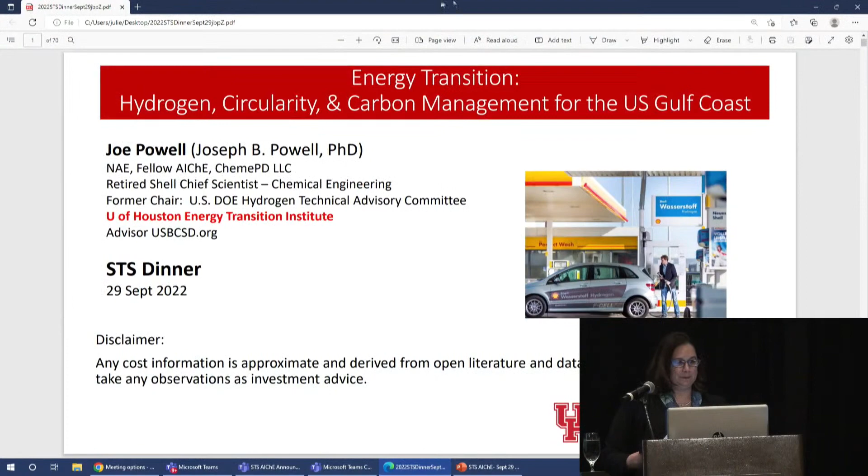So I guess the lesson is if you say yes and volunteer to do things, you'll be surprised at the number of things you can get involved with over a long career. And AIChE is one of the greatest places to be to do that.

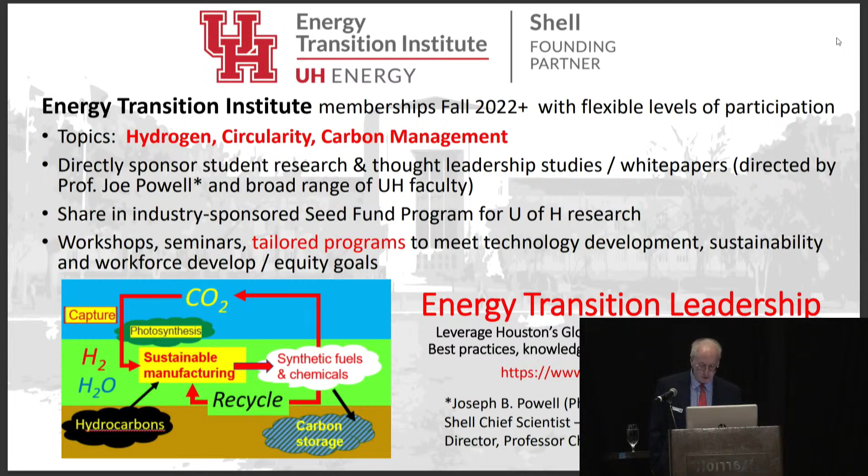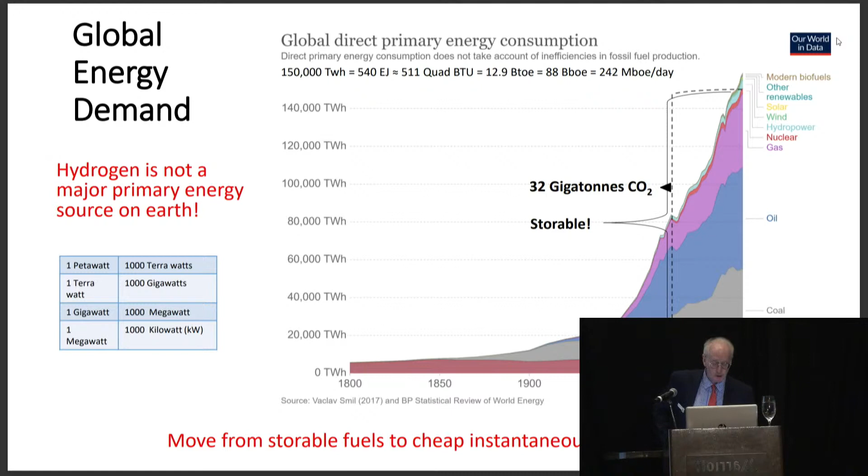Excuse me. So global energy demand. Looking at a new source of energy going forward into the future here. Everything we've seen to date has been a storable fuel, starting with traditional biomass and then moving up to coal, oil, and natural gas. But if you look at the energy sources that are emerging today, they are primarily the renewable wind and solar, and they are not storable. So that's really going to be a game changer in terms of the energy transition going forward and should give you food for thought in terms of how to manage these systems.

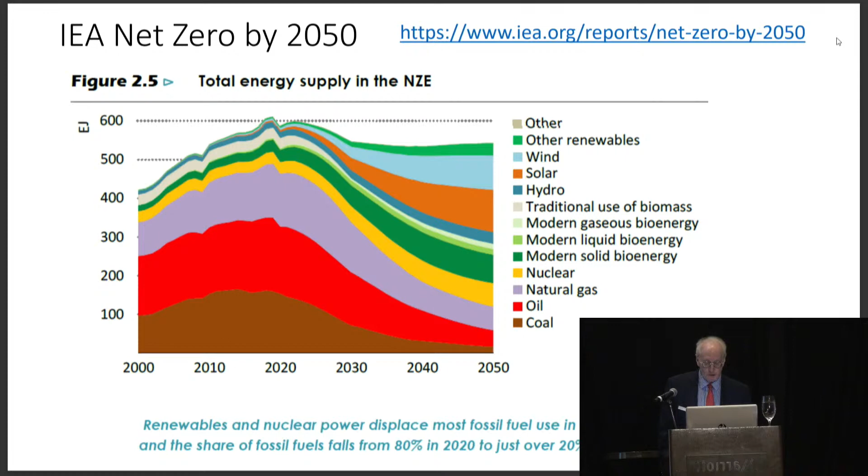So the IEA looks at a pathway to net zero. Shell has published the same in its Shell Scenario publications. The issue that everyone is looking at is, when is peak oil and gas and coal, certainly, and the IEA is saying that's here right about now. And so looking at future energy, we're going to be moving into more of those renewables. You see solar in orange here, the wind in blue, other renewables in light green, and diminishing use of the coal, oil, and gas there in the center, starting at about this point in time. So that's what the energy transition is about.

Hydrogen, where is it going to play in this energy transition? So we have a course on that at the U of H, and my boss, Ellen Rossiter, is teaching that hydrogen economy course. If you want to be learning more about that going forward, there's a 3-hour credit class where we get into much more detail than what you will hear about tonight.

But the important thing to remember about hydrogen is its greatly expanded use, not because of the traditional uses of hydrogen, but because it's going into new sectors, and that includes mobility, industry. It's replacing a number of features that were previously serviced by gasoline and petroleum, but then also on the liquefied natural gas side of things. And if you look at where that can be happening, the key point is the energy density of hydrogen relative to electrification and batteries. So you really can't move or store energy in the form of batteries and can't make those movements over great distances. And so you're looking at hydrogen as that vector that can be moving this energy around and storing it.

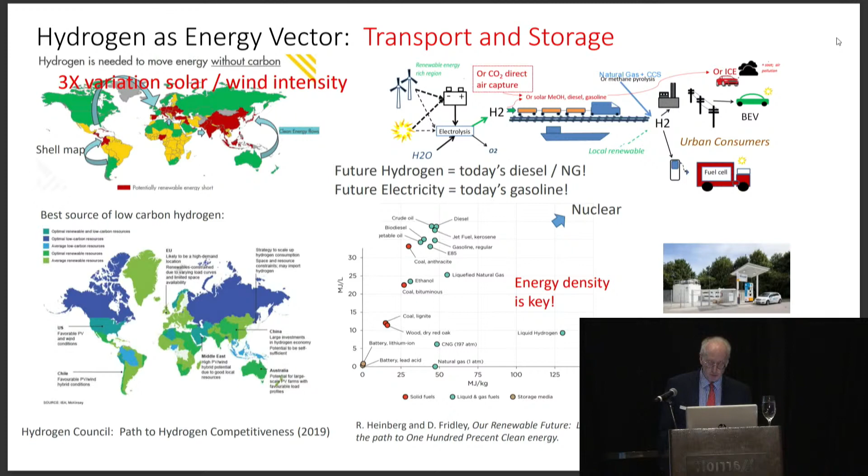On the bottom left, you see locations in deep blue where you can make hydrogen from natural gas with CCS and reforming. The light green are the regions where you have a lot of renewable resources. And the turquoise, which includes this region, the US, but also the Middle East and a few other locations, are where you can do both. And so those are the resource-rich regions that the world will be looking to for energy, and hydrogen is one of the key vectors to get it into the markets where it's needed. Again, because of that energy density.

So looking at roadmaps going forward on what is the prognosis for the emerging hydrogen economy. And so this particular reference from the World Energy Council shows the roadmap of roadmaps.

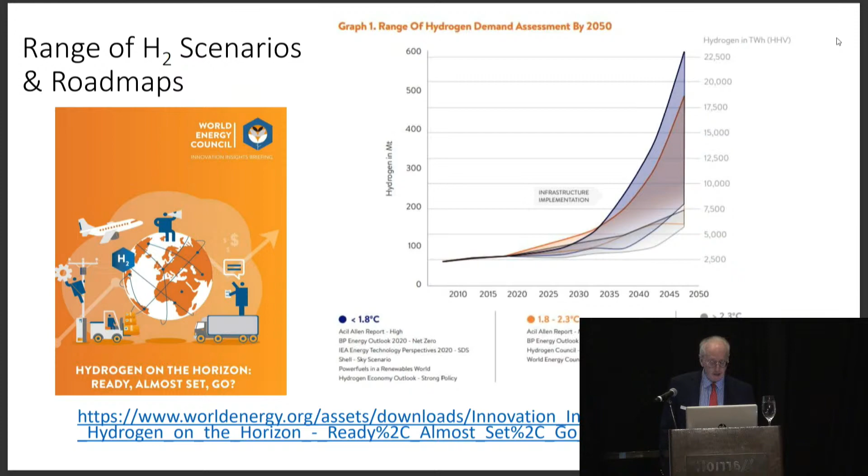Hydrogen can have growth from something like twofold, 200%, up to more than 10 times that in terms of future demand. A lot of that depends on local energy security issues versus the amount of global trade. If you look at the Shell scenarios, in the most ambitious scenario where the world is most wealthy is where we have a lot of trade, and there will be a lot of hydrogen uptake as the vector for renewable energy trade, with a large uptake in the use of hydrogen going forward.

Now, hydrogen is not new. Discovered many centuries ago, there was a novel from Jules Verne, Mysterious Island, where they actually predicted the electrolysis of water and using renewable energy to generate hydrogen from water. So certainly it's been known and a usable vector for some time, but we're now just getting to the point where we can really see it become a commercial reality. I was born at the time of Sputnik, where really the space race challenge and the arms races from the Cold War era became front and center.

Hydrogen was a very important mechanism involved in our early space programs, in terms of the clean energy provisions for the space flights, from the Gemini missions and Apollo later.

Going into 2000, the second President Bush said that everybody being born at that time would be driving hydrogen fuel cell vehicles by the time they were graduating from college. That didn't happen. Ballard Power Systems had come up with the first commercial fuel cell about that time, and there was an assumption that the hydrogen economy would be taking off from then. It didn't happen because the other factors needed to make hydrogen successful had not been co-invented to the point where the cost could be reduced enough for it to be a viable vector.

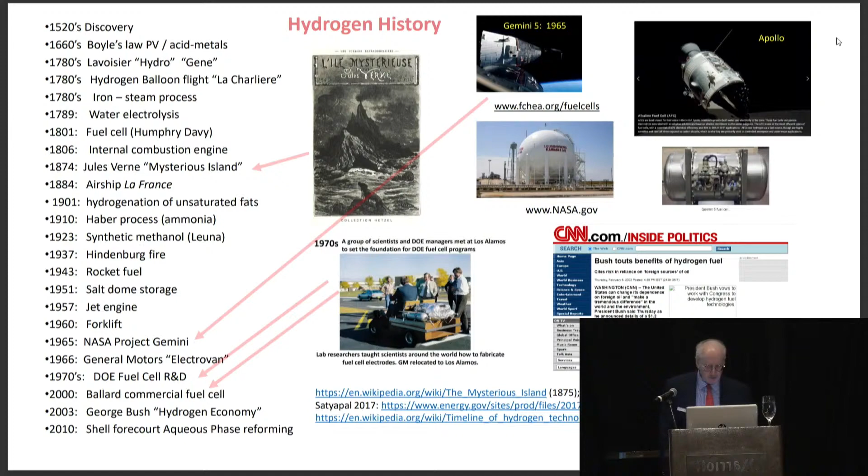You really have to care about climate change and clean energy to be competitive in this market space. And that's what we're seeing today in terms of what the stakeholders are saying about what they want in future energy. So the US DOE looks at hydrogen at scale.

We're all chemical engineers here, you know the six-tenths power rule. But if you can get your end uses up so that your scale of manufacturing can be strong enough, then the price of manufacturing comes down. To do that, you need to see hydrogen going into multiple sectors, from transportation to traditional ammonia fertilizers, also in industry and metals production, and in transportation fuels and refining. That is a key mechanism that's in all of the FOAs that are coming out now in terms of trying to launch the hydrogen economy.

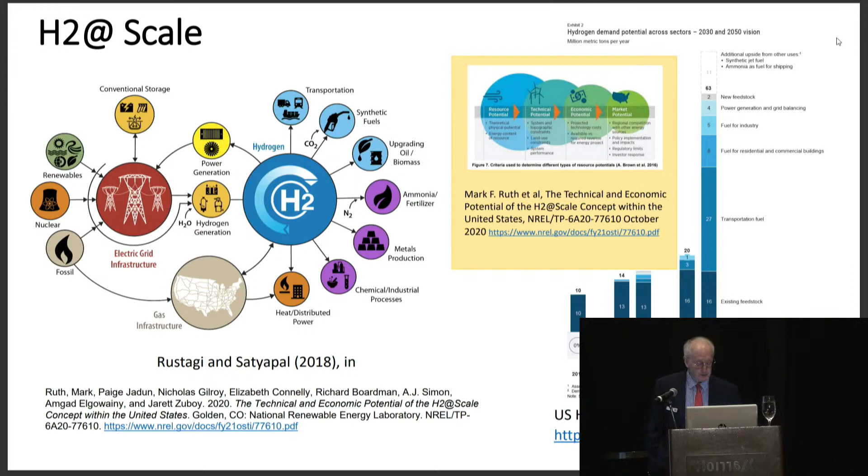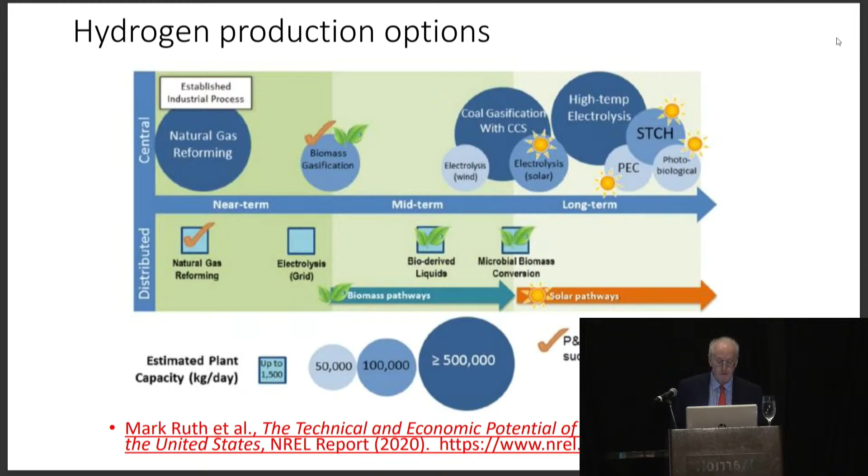You can make hydrogen, of course, from natural gas or any carbon-based fuel using reforming reactions with water. You can gasify biomass, and you can also bring in electrical power from renewable energy, nuclear and others, and do electrolysis of water. The production can either be central or distributed because of all these different routes to production. And the critical issue is how will this sort itself out as we move forward into this potential hydrogen economy.

Many people talk about the different colors of hydrogen. Tonight, I'm only going to focus on about 3 of the key areas. The gray hydrogen is the traditional manufacture of hydrogen, mostly from natural gas today. The ones we're really focusing on going forward include the blue hydrogen, which would be the same reforming of natural gas, coupled with carbon capture and storage, CCS, to reduce the carbon emissions associated with it.

If you're using renewable energy, then that's usually called green hydrogen. Some people call it yellow if generated from solar power, but green is the most common term, implying it's derived from green energy. If it's coming from nuclear power, it can be called pink hydrogen. And then turquoise is hydrogen produced by pyrolysis of methane into solid carbon and hydrogen, and we'll talk about that in just a moment.

White, as we were mentioning earlier, is naturally occurring hydrogen, which has limited availability, but is now being discovered in small amounts subsurface.

So cost of hydrogen—there's an excellent paper from Parkinson at Imperial College that does a nice literature review. These days you have to adjust all numbers for inflation, but up to two years back, these numbers were quite good and give a good comparison of estimates of what the different routes to hydrogen would entail in terms of costs, and also some of the details behind that.

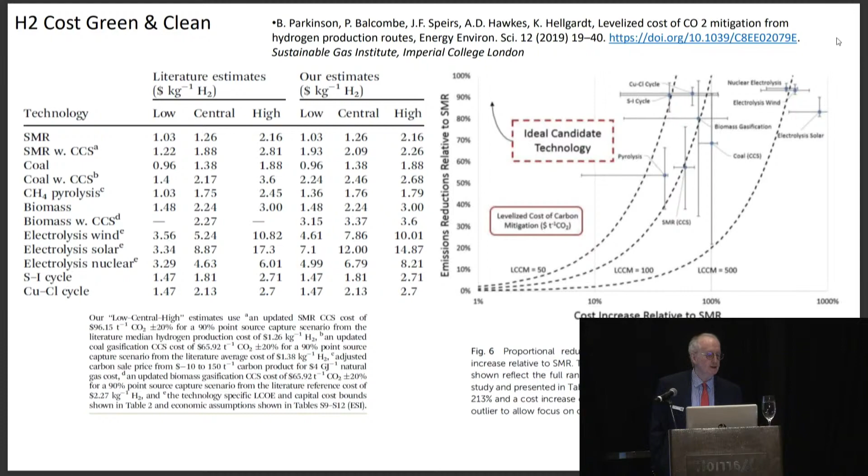The thing to keep in mind when you're looking at all these different colors of hydrogen, and especially blue hydrogen, is that the extent of decarbonization can vary quite a bit with that hydrogen. So you really have to look beyond the colors and ask what is the total carbon footprint associated with that hydrogen in terms of the production process by which it was delivered.

These are some of the key reactions underpinning the green electrolysis of water, which requires a very large amount of energy. Turquoise methane pyrolysis requires quite a bit less, but you have to be able to do something with the solid carbon, and that has to be a sequestered product.

If you're going to put it into tires and make carbon black and then burn the tires after five years, that's going back to the atmosphere, and so that is not sequestered carbon.

Steam methane reforming, again, is the most prominent way of making hydrogen today. You're making CO2, and then you have to capture and sequester the CO2 or turn it into utilization products, as we'll talk about in the second part of the presentation tonight.

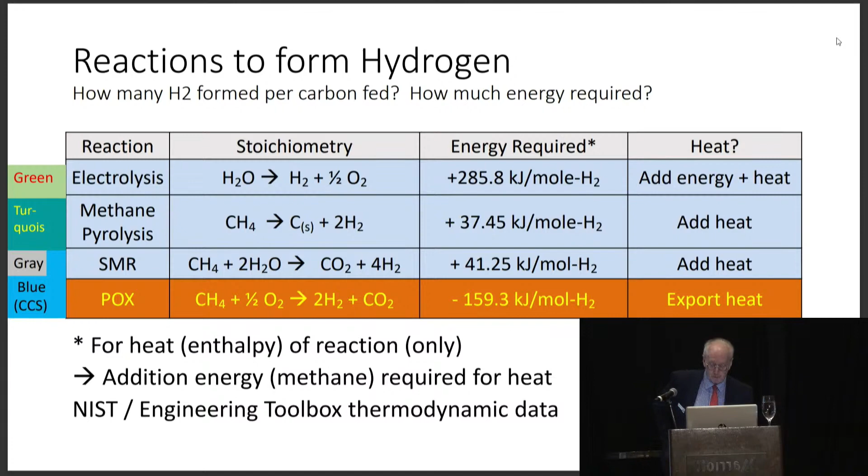You can also do all of this by partial oxidation and autothermal reforming, and we'll talk about that more in just a moment.

If you're looking at feedstock choices, you can take anything that has carbon in it and reform it with water to make hydrogen. Of course, methane has the highest hydrogen-to-carbon ratio, and so it's the natural starting point.

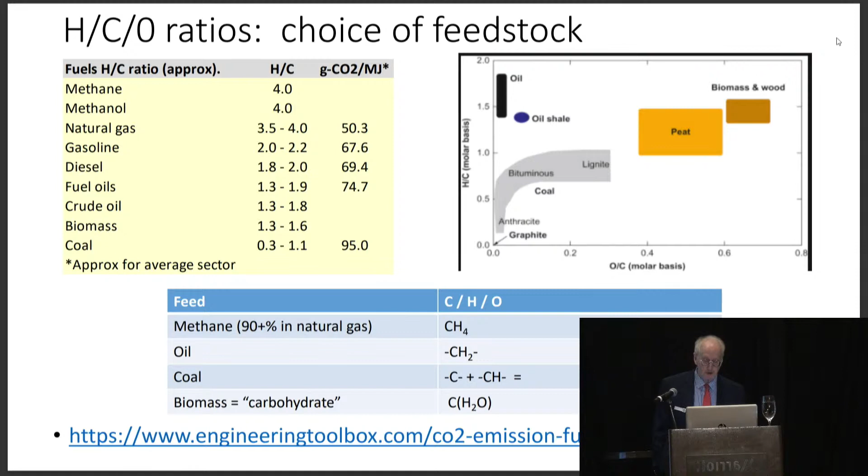If you're into biomass, you have to subtract out the water component and recognize that biomass is quite a bit carbohydrates, which means CH2O, and you really have to subtract out that amount of hydrogen that's complexed with water in those molecules to understand the effective ratio. But methane, having the highest ratio, is the preferred feedstock for synthesis from the fossil fuels.

Hydrogen via biomass gasification—you certainly can do that. At Shell, we spent quite some effort developing advanced biofuels processes, but the interesting thing is you're struggling with the energy density there. If you look at that truck on the right-hand side and look at the energy density of wood or wood chips or a typical biomass feedstock, it's coming in 50% wet, drying is difficult, and much of the molecular composition is carbohydrates.

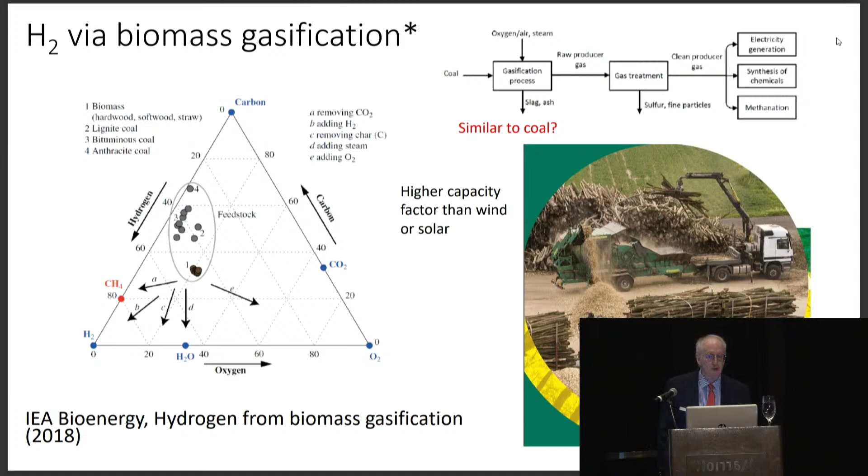When we were considering trying to develop an advanced biorefinery and the radius from which we could collect biomass, the largest we could do was about 1/20th the scale of the Port Arthur refinery. To do that, we needed about a truck a minute, as you're seeing here on the bottom right, coming in to supply that feed chain.

The nice thing about biomass gasification relative to using solar and wind is your capacity factor can be higher, because you can store the biomass and use it potentially year-round, giving larger operability out of your hydrogen reforming unit.

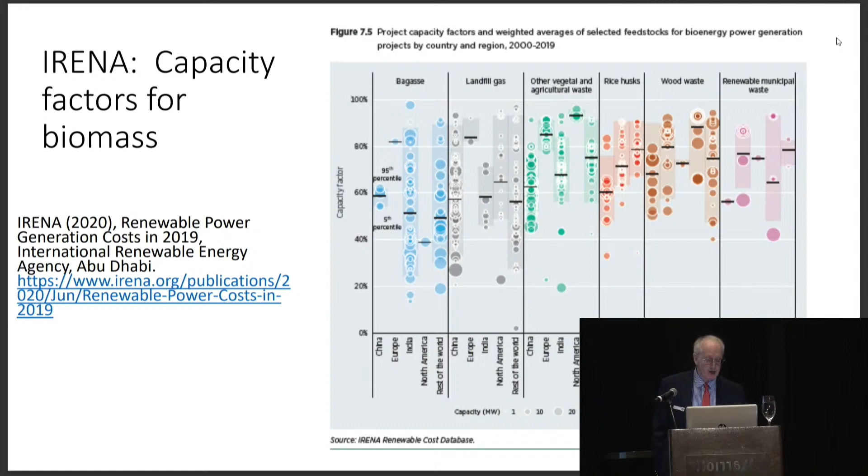As I mentioned, if you're looking at steam reforming—trying to retrofit existing operations to capture some of the CO2 and have a lower carbon intensity, or developing new processes—there are several places in the process where you have to consider capturing the CO2.

A number of companies have partially decarbonized there and removed a fraction of the CO2, but it can be expensive to remove all of it from steam methane reforming. Hence that has to be taken into account when you're looking at how much decarbonization you're seeing with what is called blue hydrogen from steam methane reforming.

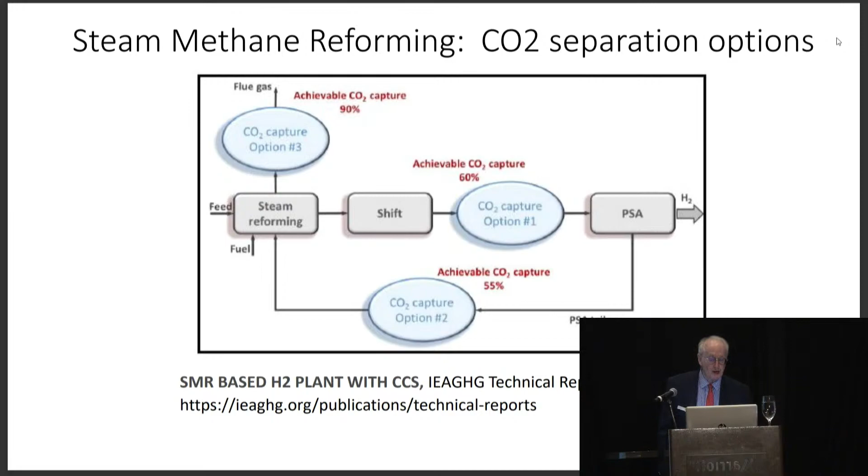If you look at changing the process technology, the problem with steam methane reforming is the process itself generates CO2, but it's also a very endothermic reaction, so you have to bring in process heat and capture the CO2 from the process heat side of the equation.

If you flip that around and start combusting some of your feedstock in the process by adding oxygen, then you can have autothermal reforming and capture the CO2 in one place more economically. And if you go further, adding a little bit more oxygen, you can actually generate a little bit of excess steam to make clean power and power the whole process.

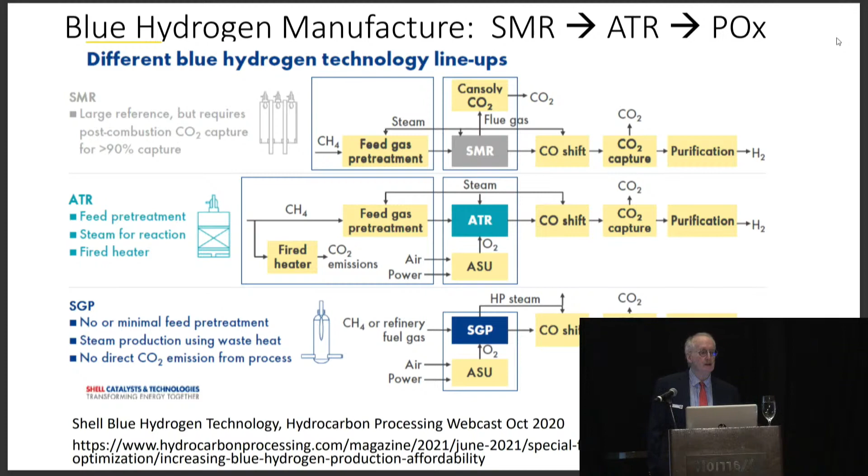That's one of the approaches Shell prefers, the partial oxidation or gasification approach, where you're adding some oxygen, combusting it inside the process tubes, producing excess steam to generate clean power after CO2 capture to run your entire process. It's actually a slightly exothermic side of the process with that configuration. So the bottom line is future modes of production of clean hydrogen may differ from the standard SMR you're used to today.

The US DOE last year announced an earthshot of 1-1-1, a goal to achieve $1 per kilogram of hydrogen within the next decade. That's quite an ambitious goal. You can almost do that with blue hydrogen by steam methane reforming, POX, or advanced reforming with carbon capture and storage. But to get truly low CO2 footprint hydrogen, the DOE is looking at moving electrolysis into this cost range within the next decade.

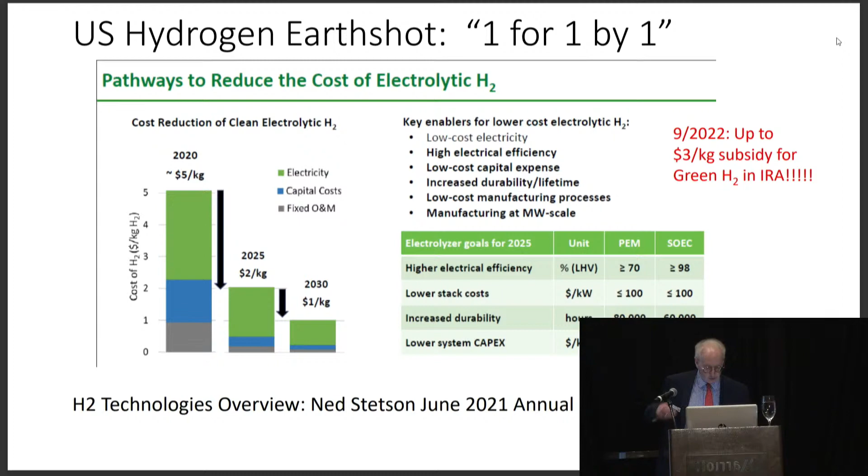So you see a lot of activity to reduce the cost of renewable power, but also reduce the capital cost involved with electrolyzers and improve their lifetime and durability as part of the DOE's R&D programs.

We've seen a lot of announcements about R&D efforts within the last half year, and many of us in this audience are probably pursuing those, looking at how to really push technology development to get those costs down.

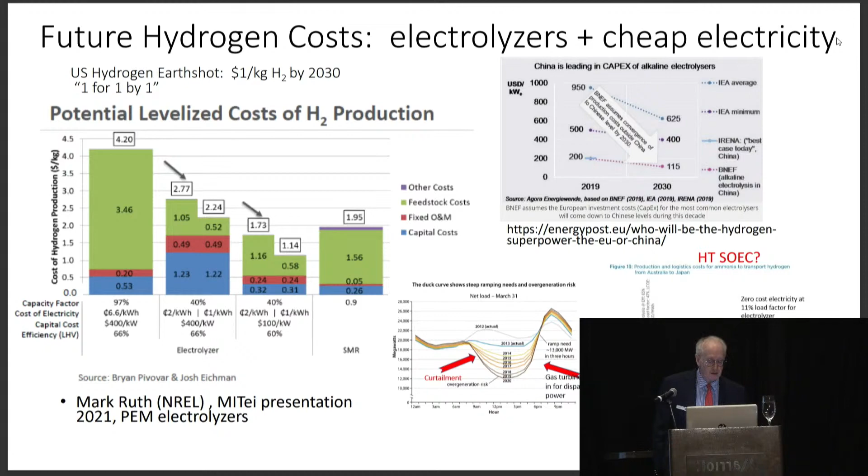Some of that, as you see in the duck curve in the lower part of the diagram, can be effective ways of using curtailed power at essentially zero cost, perhaps with a capacity factor as low as about 11%. Electrolyzers in China are about 5 times less expensive than in the West, so understanding modes of production and producing reliable electrolyzers with Western codes and standards is another challenge in figuring out how to get those costs down. It's a very active area of research and development, but also commercialization at this time.

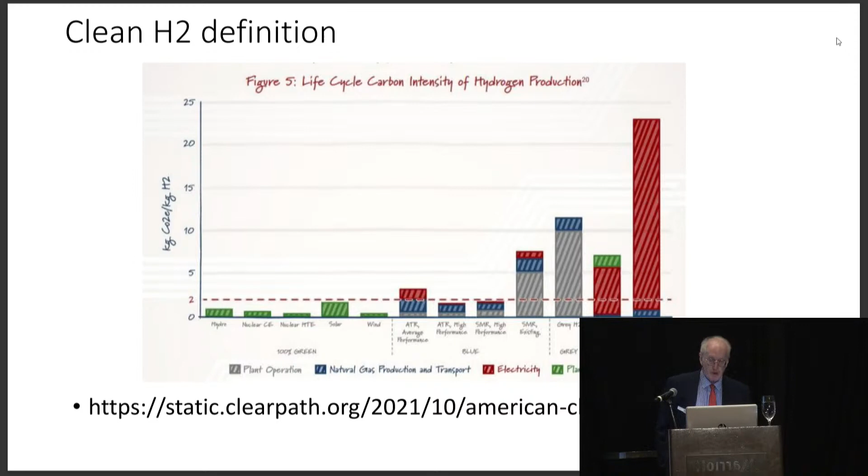The clean hydrogen definition is moving from a typical 10 kilograms of CO2 per kilogram of hydrogen coming off today's SMR gray technology, down to 2 kilograms CO2 per kilogram of hydrogen. This particular chart from American Clean Hydrogen says you can readily do that on the process side itself, but one really needs to look at the overall supply chain.

One of the items that's been very present in the news, especially over the last 2 to 3 years, is methane leakage. Methane is a much more potent greenhouse gas than CO2 — on a 100-year basis, it's gone from about 25 up to 28. But a lot of NGOs, including the Environmental Defense Fund, are looking at the 20-year global warming potential, which goes as high as 110 times more potent than CO2 on the short time frame. They're putting a lot of back pressure on the natural gas economy, and how this impacts hydrogen means looking at the supply chain up from the wells to the manufacturing plant, and having the hydrogen produced bear that burden as well.

If you look at the published papers out there, there are quite a number of different estimates, some of them very severe in terms of their assessment of how bad the leakage rate can be.

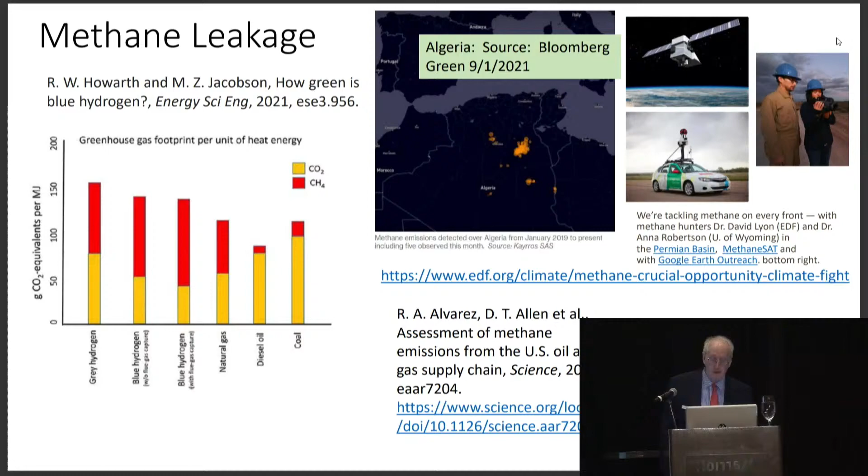The one on the lower right from David Allen at University of Texas is perhaps a more balanced assessment than the Howarth and Jacobson paper. But still, with the natural gas coming from the Permian Basin and the difficulty in producing the wells from the liquid production and fracking going on there, that is a challenge to get a handle on in terms of using natural gas as a source of clean hydrogen.

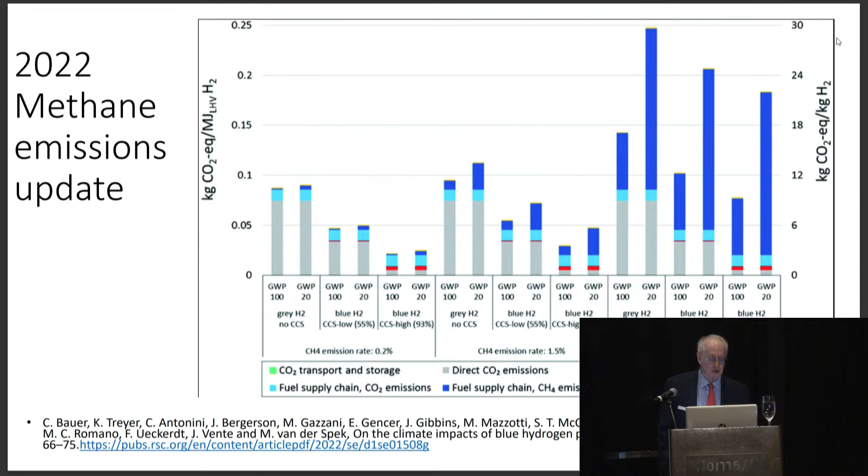Here's a better study, a global paper with authors from the US and Europe, looking at kilograms CO2 per kilogram of hydrogen as a function of different technology ranges, and looking at different global warming potentials for methane. GWP 100, the 100-year potential, is the lower value, and the 20-year value is much higher for methane. The result of this study is that it's still a challenge for blue hydrogen to become clean if you look at the overall supply chain, considering production and transport from the production wells.

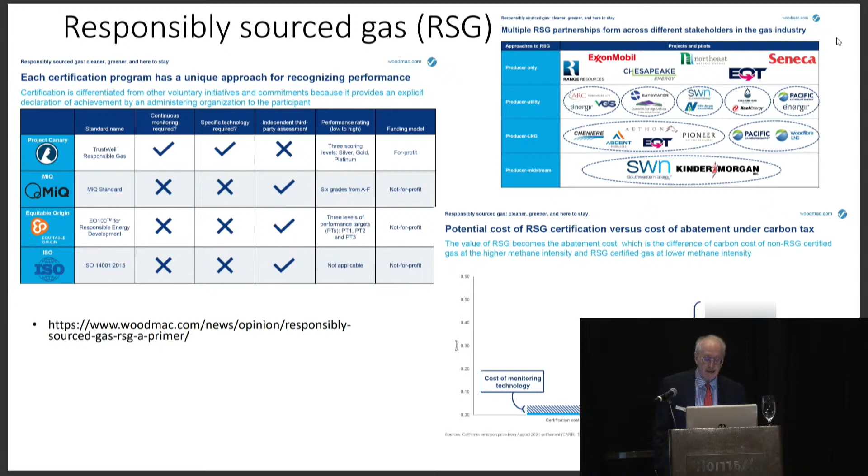I would say that if you're using the best production technology, and if you look at the leakage rates that Norway has demonstrated as plausible, 0.2%, it is possible to produce clean hydrogen using natural gas, even considering the most severe 20-year global warming potential for methane. That's something to keep in mind, very important for this region, but also in terms of managing your projects and decision making.

There's also news that hydrogen itself can be an indirect global warming agent, and that has gotten the attention of a number of NGOs. But if you do the analysis of what that impact could be...

If one were to replace the fossil fuel economy today with hydrogen and leak 1% of that, the positive impacts of that replacement would only be reduced by 1.8%. And if you expand that up to a 10% leakage rate for all of this hydrogen being produced, then you're backing out about 18% of the advantage, and that's a much larger number than you could ever afford to be leaking out of that supply chain.

So the bottom line is that the indirect global warming potential of hydrogen causes consternation in the news, but it's really not that big of an effect in terms of its impact on the hydrogen economy. But you do need to have the numbers in mind so that you can make that argument when necessary.

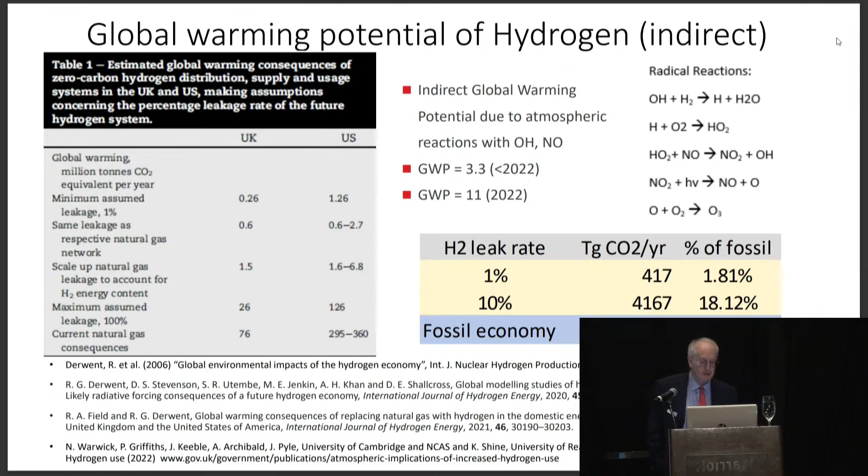The issue is the size of the energy economy that the hydrogen is flowing into relative to the size of the chemical economy. The energy economy is more than 10 times greater than the chemical economy. If you really want to do methane pyrolysis and produce hydrogen in a big way, you need to be moving the carbon into applications beyond traditional petrochemicals, going after substitutions of things like steel and concrete in order to get the materiality to have the two sides matched.

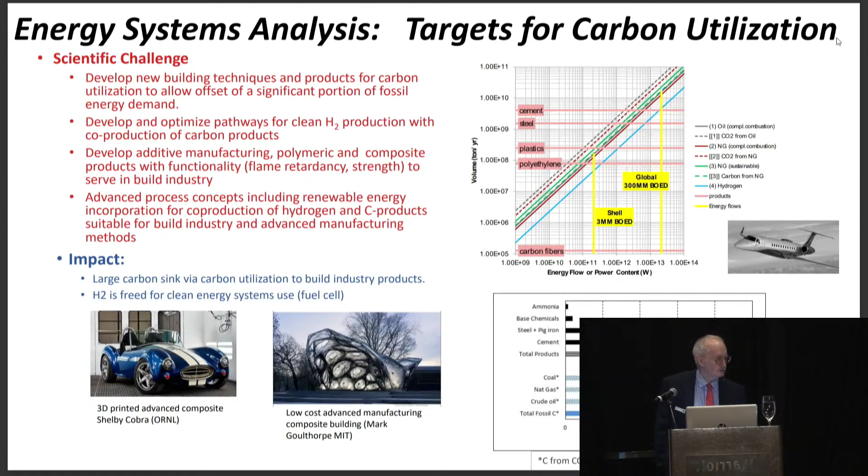You can also dump the carbon into coal mines and forget about getting an advantage out of that, and just consider it solid carbon storage. So those are things people are looking at in terms of methane pyrolysis. I would say that is a technology that can be used in places where you don't have the ability to do CO2 storage. We're blessed with that ability to do the storage here on the Gulf Coast, but there are many places in the world where you can't do that.

Moving and transporting hydrogen: looking at the various vectors, it's traditionally used, moved and stored as a compressed gas. You can do a liquefaction with an energy penalty, but energy density goes very high when you do that. You can look at other carriers like ammonia, and there's a lot of research in things such as metal hydrides and other solid sorbents. We'll talk about more of those carriers going forward.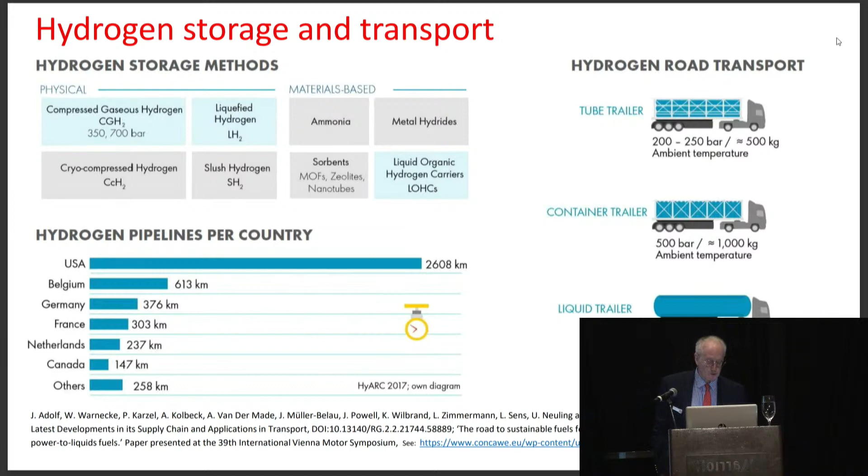Today, you see most of the transport occurring in the gaseous phase via tube trailers or container trailers, and in some cases liquefaction. The Gulf Coast has the largest collection of pipelines in the world, but they're all private, and there's not that much of it. So pipelines may be more of the vector going forward into the future.

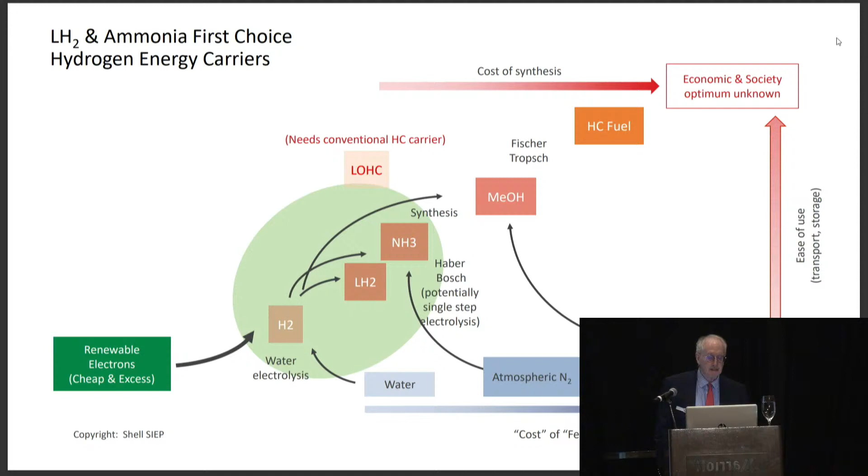Let's consider how hydrogen plays a role in the vector of energy. If you've got renewable energy in the form of electrons, you can make hydrogen, or liquefy it, or make ammonia as a carrier, or make more complex molecules like liquid organic hydrogen carriers, or react it with CO2 to make methanol, or go back through synthesis gas and make hydrocarbon fuels. As you go up that chain, the convenience of handling the fuel improves, but the cost goes up and the efficiency of the energy use goes down.

The typical way to consider long distance transport is by making ammonia, which is very stable. The way to do that is to generate your hydrogen by electrolysis or steam methane reforming, then run the traditional Haber-Bosch synthesis process. Direct electrochemical ammonia synthesis is challenged because of solubilities and rates, so Haber-Bosch still comes into play for the second step of that conversion. There's a lot of consideration on use of ammonia as that vector on long distance shipping routes.

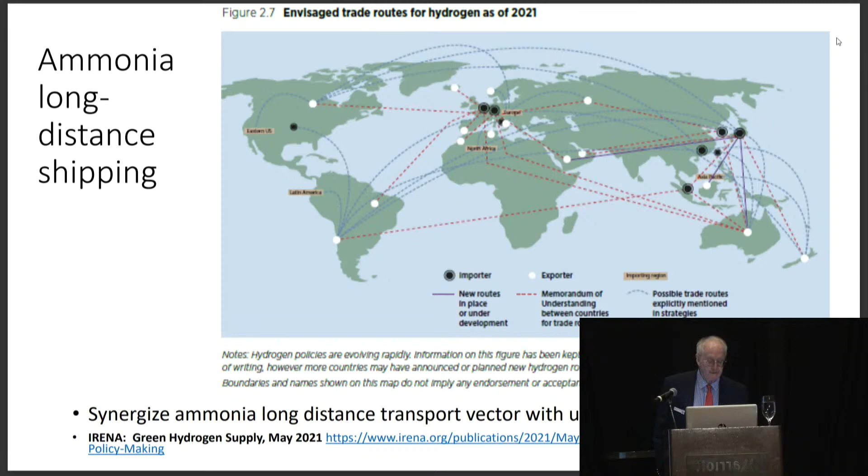A number of projects proposed commercially already today, more than 370 or so proposed worldwide, and many are considering ammonia as the vector for moving hydrogen around.

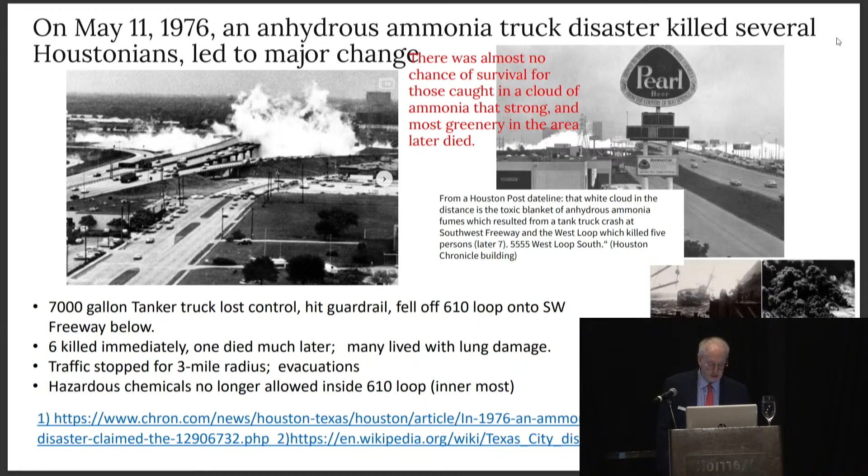Now, one of the 10 worst days in Houston's history was the day an anhydrous ammonia truck fell off the 610 loop near Highway 59, and spilled, killing 6 people immediately and damaging lungs for about 100 or more others. It's an example of the toxicity of ammonia as a vector, and that needs to be taken into account in terms of how it might play into the future economy.

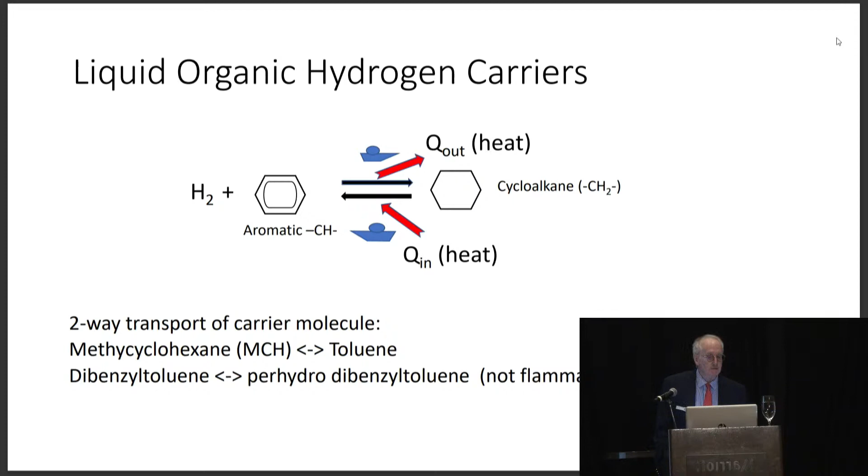One way to counteract that is to consider use of liquid organic hydrogen carriers. These are essentially aromatic molecules, the simplest being toluene, which you can hydrogenate to a cycloalkane, then take that to market and apply heat to dehydrogenate and recover your hydrogen. Methyl cyclohexane toluene is one combo, and another is dibenzyl toluene / perhydrodibenzyl toluene, which has the advantage of being very low in toxicity and non-flammable.

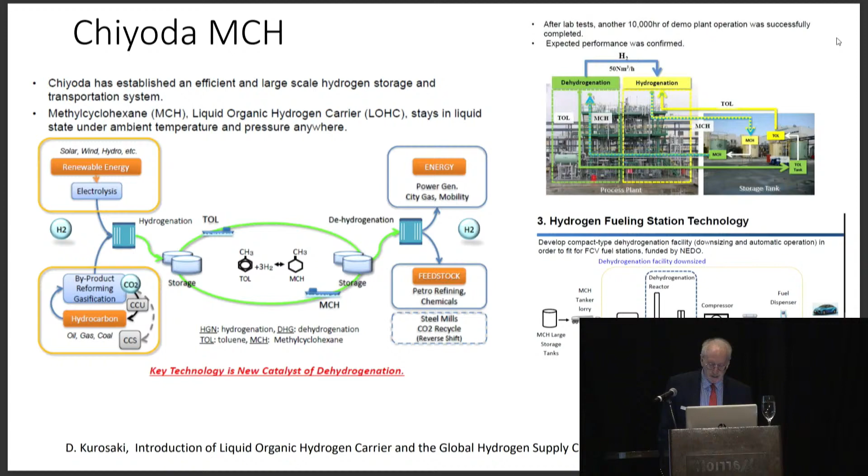Chiyoda is looking at the methyl cyclohexane option. You see some of the process equipment needed for hydrogenation and dehydrogenation. That's the lower cost toluene molecule as the hydrogenated carrier, toluene being widely available. The multi-cycle ring carriers are a bit more expensive and more of a challenge, but Hydrogenious is a company looking at using dibenzyl toluene for transport down the Danube to get hydrogen into Germany because of the safety afforded by that molecule.

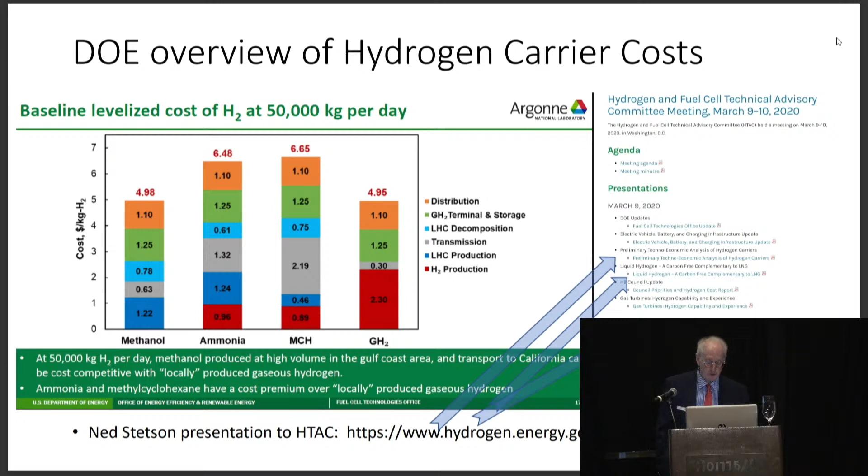If you look at the cost economics, you see the numbers all over the place depending on who is doing the calculation and the scenario assumptions about the hydrogen carriers. Ammonia, methyl cyclohexane, or gaseous hydrogen are calculated here, and going all the way to reacting a source of CO2 with hydrogen to make methanol as a carrier is also in consideration in this set of numbers calculated from the DOE.

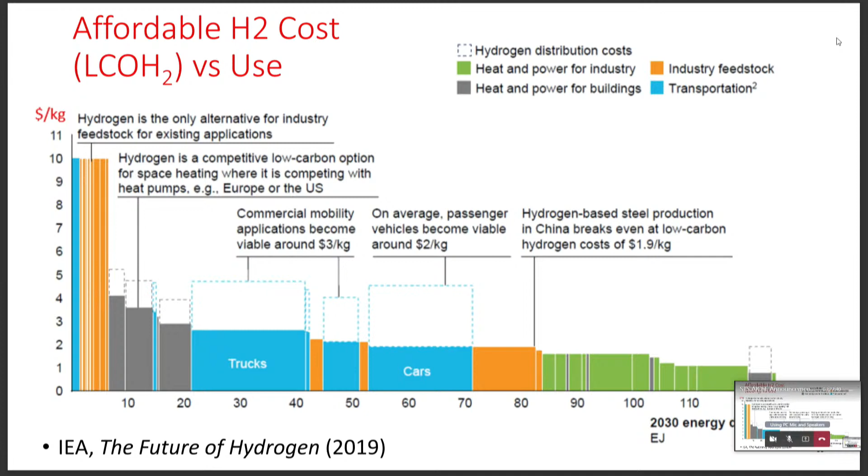But if you look at the value proposition in the transportation space by cars and trucks, that's where the highest value is. You can command something on the order of $3 a kilogram production and $5 a kilogram dispensed, because 1 kilogram of hydrogen is equivalent to a gallon of gasoline or diesel, so you can compete hydrogen in the liquid fuels market if you can make it for around $3 a kilogram.

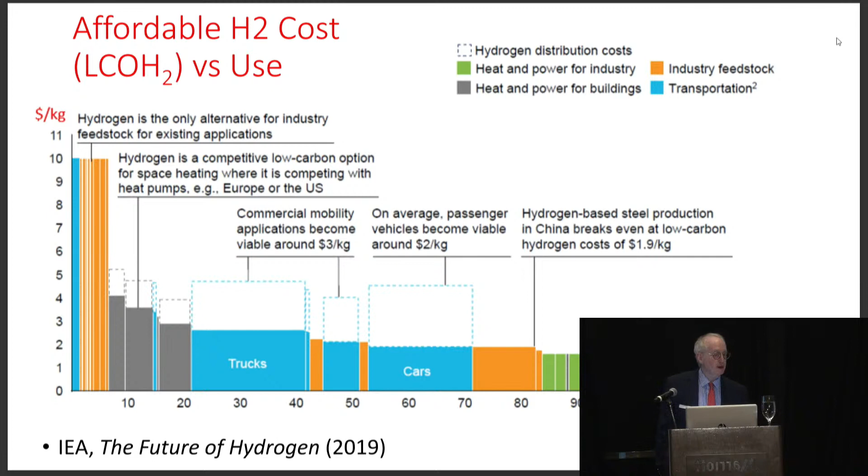If you look on the right-hand side, and if you're trying to replace utility power or industry power, that's a more severe cost challenge for implementation of the hydrogen.

The other thing to keep in mind with hydrogen is we've to date been working with fuels, and where electricity has been made, it's been predominantly made by combusting a fuel and then running a cycle to generate electricity. And now with renewable energy, you're actually getting access to the photons or the electricity and wind-driven electricity first. And if you want to make a synthetic fuel, that's now a derivative off of the primary energy source.

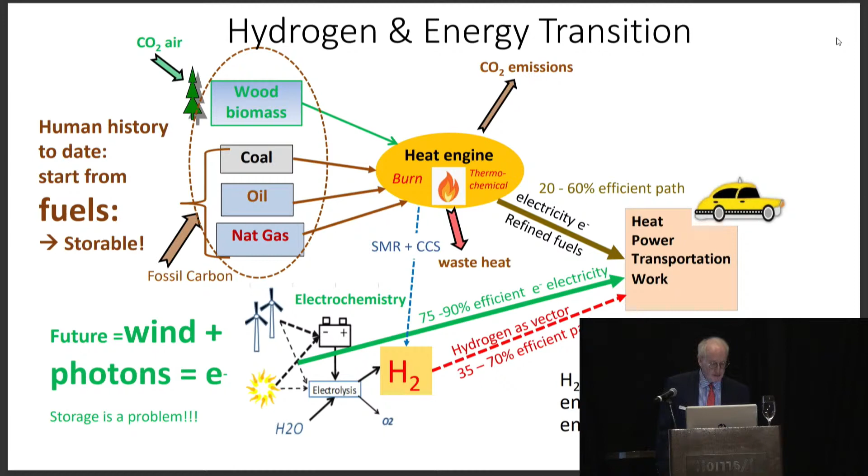And so with hydrogen, you really have that opportunity to be taking those electrons and be using them more efficiently in electrochemical devices or fuel cells and not be combusting them in heat engines. And so that's an important consideration to keep in mind in terms of trying to maximize the efficiency. So a battery versus a fuel cell. We're all familiar with batteries. You're putting in electrical power, storing it, and then taking it back out as work.

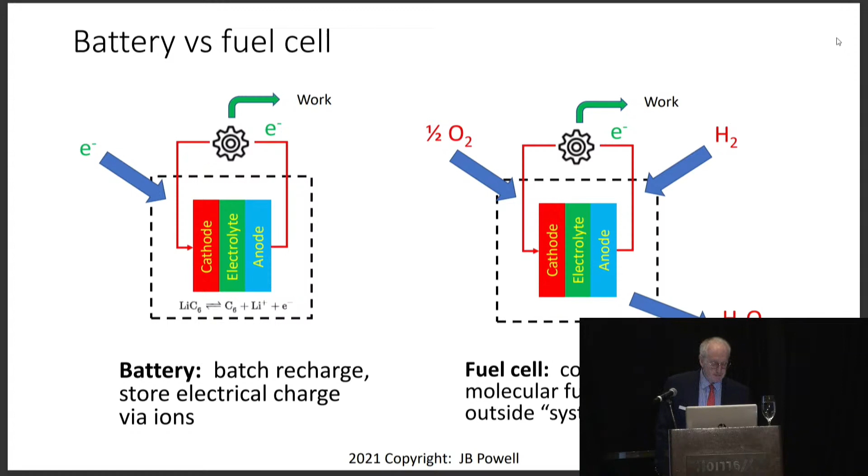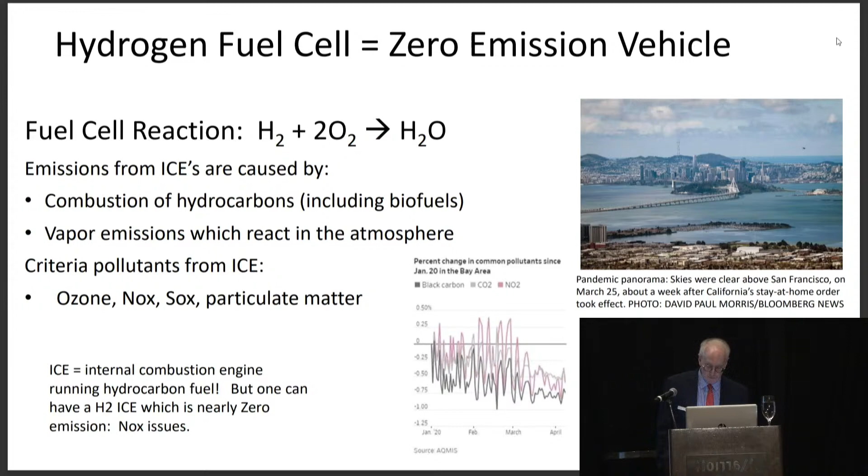The other critical thing about this is that these, both the hydrogen fuel cell vehicle and the battery electric, are zero-emission vehicles. There's no criteria pollutants coming out of the tailpipe. And at Shell, I worked on biofuels for more than a decade, as many other companies were involved in that. And the biofuels are nice from a CO2 management point of view, but if you put them in a combustion engine, they're still producing smog, particulate matter, and all those things that people care about in terms of air quality and health. And so therefore moving to electrification via hydrogen fuel cells or battery electric is really where the stakeholders are asking the transportation sector to go. Not just CO2, but also the air quality and criteria pollutants.

And the story behind that is that if you're running a warehouse, you want a zero-emission vehicle for your workers. And so diesel is not effective. And the industry looked at electrification as the first thought. But it takes time to recharge those forklifts, and their power performance goes down across their duty cycle. And so Plug Power and others came in with a hydrogen alternative to that using fuel cell-driven forklifts and essentially took over the market.

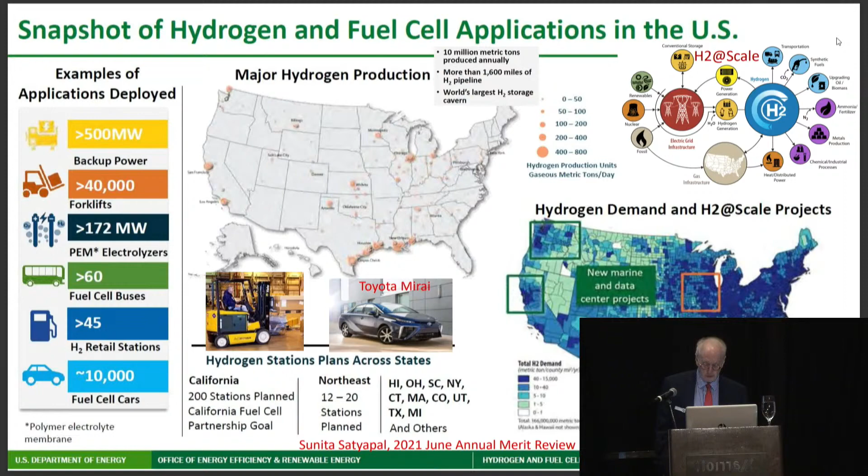So what you see now, and that's with no incentives for clean air quality or CO2 emission reduction, but the commercial advantage was you needed 10% fewer forklifts, you could maintain them running throughout the day because of the rapid refueling relative to battery recharging. And hence, with that value proposition, they are now the dominant way that goods are moved at Home Depot, Walmart, Amazon, and the like warehouses. And so Plug Power is looking to leverage that business model in terms of moving into the larger vehicle transport space.

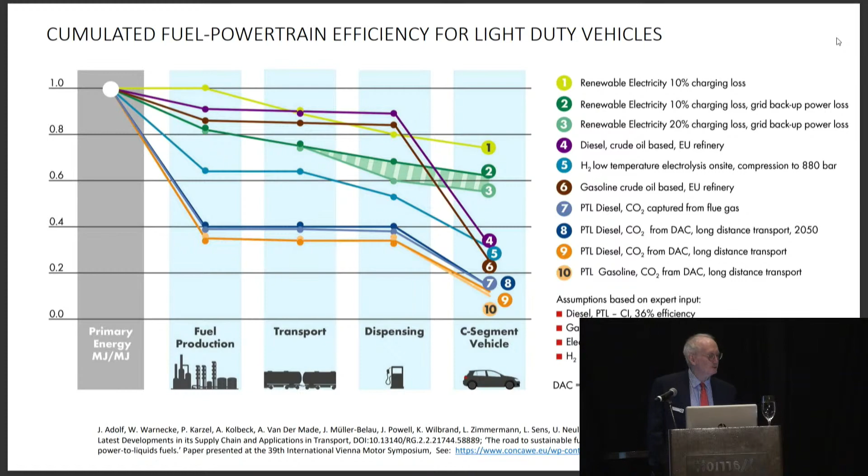So what I like to say, if you've got a wind or a solar farm, you can have one of them to supply a given supply chain of battery electric with the efficiency of that storage. It'll take twice that number if you want to go hydrogen and use fuel cells, and it'll take 4 times that if you want to make a synthetic aviation fuel or the like. And so you have to have a very good reason for wanting to do anything other than electrify.

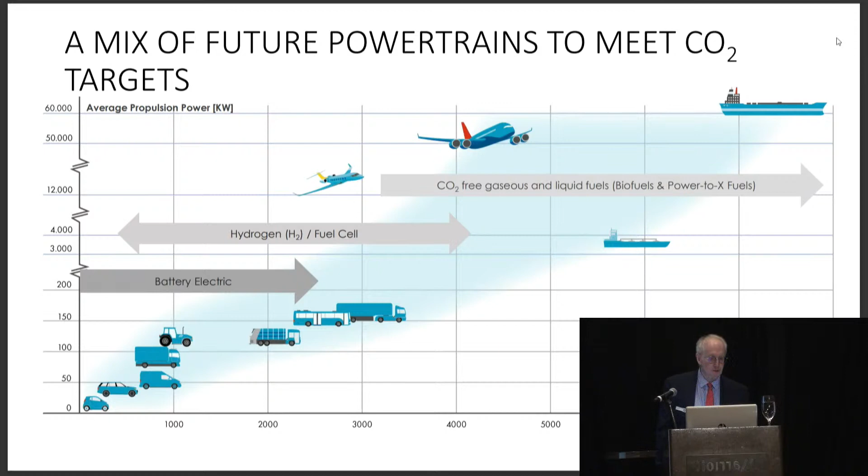But the reason that you do need to do something other than just electrify is because of that power density. There's a number of transport applications that just can't run the lower power density afforded by batteries. And so hydrogen is seen as a vector, anything above the tiniest of vehicles and up into some of the smaller side of the aviation space. Ammonia perhaps for that tanker you see in the upper right. Perhaps synthetic aviation fuel still needed for the jumbo jet. But we saw, because of the commercial refueling advantage, hydrogen is still advantaged on the left-hand side, even for the smaller vehicles like the forklifts.

So the OEMs are looking at this equation. McKinsey and the Hydrogen Council have a cost curve on the left saying that hydrogen trucks can become competitive with diesel by 2030. A number of the manufacturers are considering this space. Scania was saying, I want to electrify all the trucks in Denmark, and I want to avoid having to do a hydrogen rollout. But last summer, their customers came back to them and said, these electric trucks just can't perform the duty cycles that we need, and we really want you to be investigating that space.

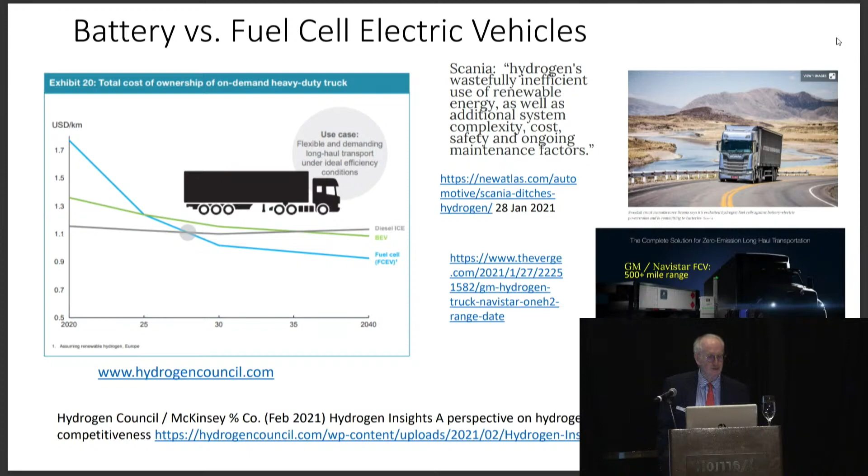GM and Navistar have been in that space for quite some time. Volkswagen made a statement that they were only going to be providing electric vehicles on the small passenger side. But again, they retracted from that a little bit last summer, and they're looking at some of the duty cycles evolving in the passenger car space. So it's a very dynamic field.

You need to look at what is the advantage beyond just the clean fuel and low smog that goes with hydrogen fuel cells or electrification in general. And the answer is these motors and drivetrains are much simpler for the electric devices than they are for the internal combustion engine. So if you look at a diesel truck, you're eliminating more than 7,800 pounds of drivetrain, fluids and lubrication systems, and also air pollution control devices. And so that's a big advantage. It also saves on the maintenance costs because they're simpler devices and there's less weight to be carried around. All that has to go into the total cost of ownership calculations in looking at these trucks, and even the passenger cars.

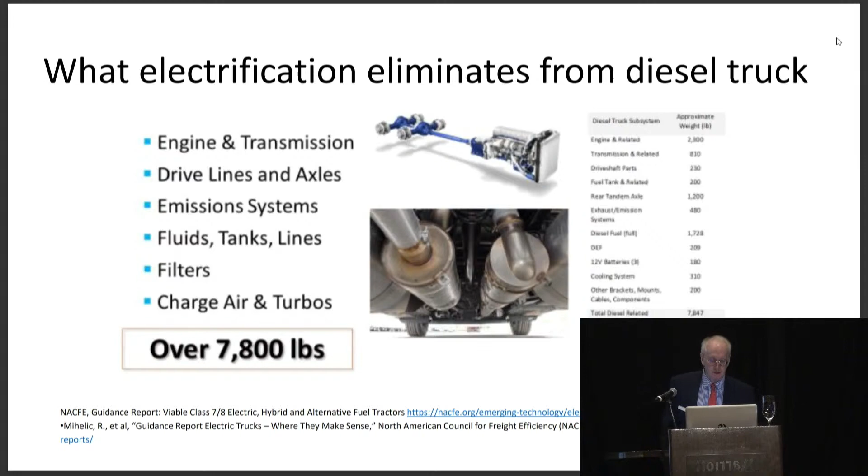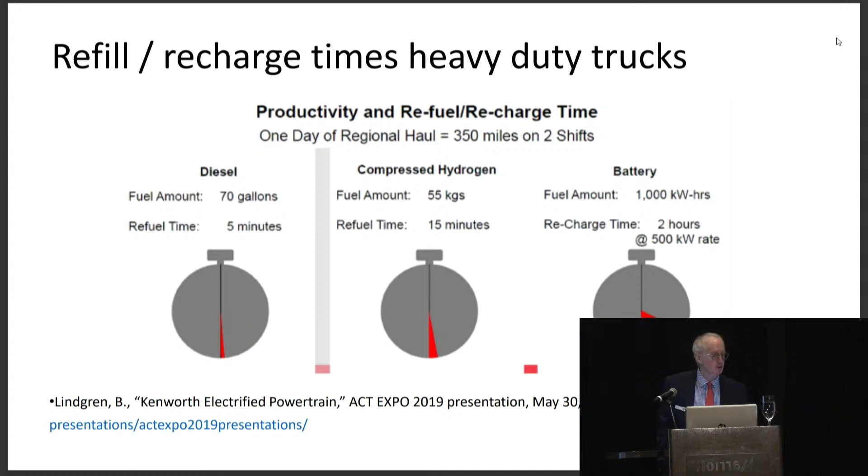This is a chart that shows the refuel times versus recharge times of heavy-duty trucks, and the answer is that a larger size truck would take up to 2 hours to recharge for a battery version, and only 15 minutes for hydrogen. And if you look at labor costs being 42% of a typical trucking fleet, the idle time of that truck plus the labor cost is a really big consideration that would drive fleet owners to want to be running hydrogen fuel cell trucks because of that advantage.

Buses, trains, ships, and planes. So it translates into other aspects of transport as well. This was a set of papers I was involved with at Stanford Energy looking across the space. And many of the entities providing these segments of transportation, especially buses and trains, looked at electrifying first, but they found again that the rapid refueling was an advantage. And if it's a train, you really don't have the power density to be able to make it from one stop to the other using batteries for many of these routes.

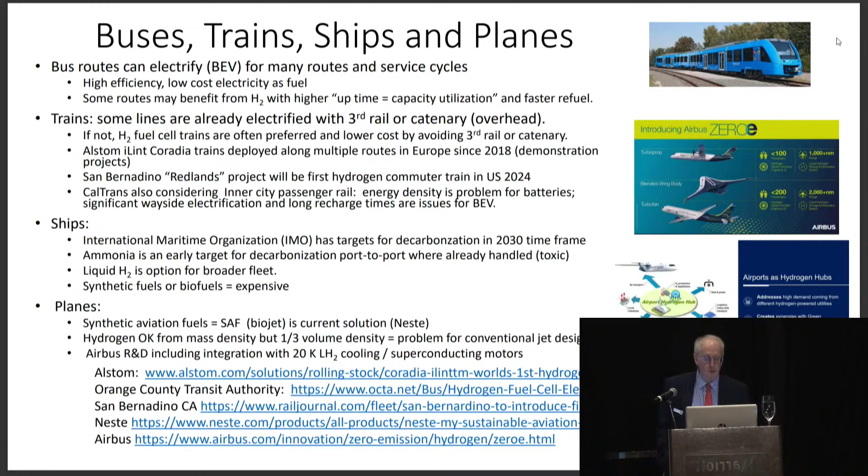And so you have to consider installing either an overhead catenary line or a third rail, which is very expensive and can be unsightly, whereas you can do it directly by using hydrogen on board with a hydrogen fuel cell. And so they found that hydrogen fuel cell trains can be more than competitive with electrification on many types of services and routes. Similarly, planes are considering electrifying in the light duty sector, but hydrogen for the somewhat heavier sector. And then for shipping, you really need either a liquid fuel, a biofuel, or perhaps ammonia or liquid hydrogen for the energy density to make those types of routes.

In terms of grid services, that's also evolving despite the lower value added. California is looking at going all renewable energy. There is an issue. Anyone who's done the scenario modeling finds you can't go to 100% renewables. You need to have at least 10% dispatchable power. And stored hydrogen can be that dispatchable power made off of that renewable energy.

So one of the commercial test markets for that is HyDeal LA, where they're looking at making hydrogen from renewable energy in Utah and then storing it there. The reason being that's the only salt dome in the western part of the US where you can brine leach the salt cavern and do large volume hydrogen energy storage. And so that will be gridded back into LA to provide commercial scale renewable power with storage, blending in on a 24/7 basis.

To do that on a large scale, you don't use fuel cells with the hydrogen, but you really put it into a gas turbine. And so companies like Mitsubishi and GE are developing 100% fired gas turbines that can effectively combust the hydrogen, not make a lot of NOx, and then provide that grid support service.

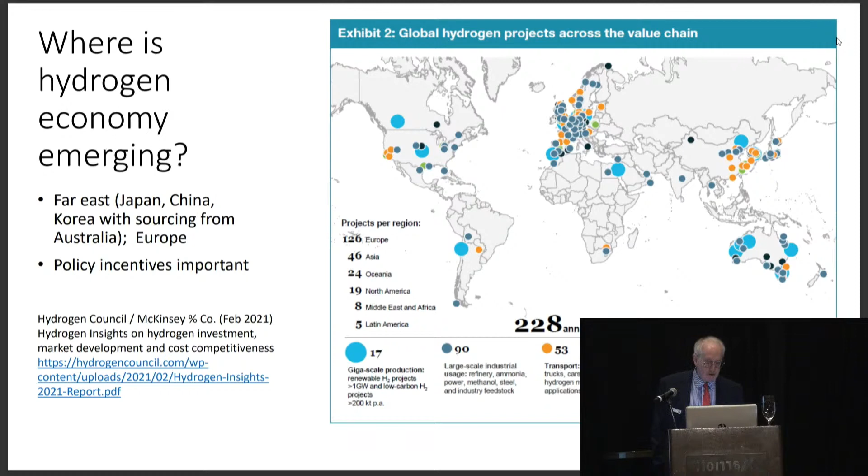This particular McKinsey study had 228 announced projects. I know our colleague for the hydrogen economy course says that's more like 370. And so it's a really very hot area in terms of scouting projects to be supplying that hydrogen vector, especially with ammonia as a carrier.

Of course, we can do that from the US Gulf Coast region as well. We have abundant natural gas resources, ability to do the CCS, and also the wind resource from West Texas, solar capabilities as well. We have a showplace project here at the University of Houston looking to recommission offshore facilities to be involved in that generation space.

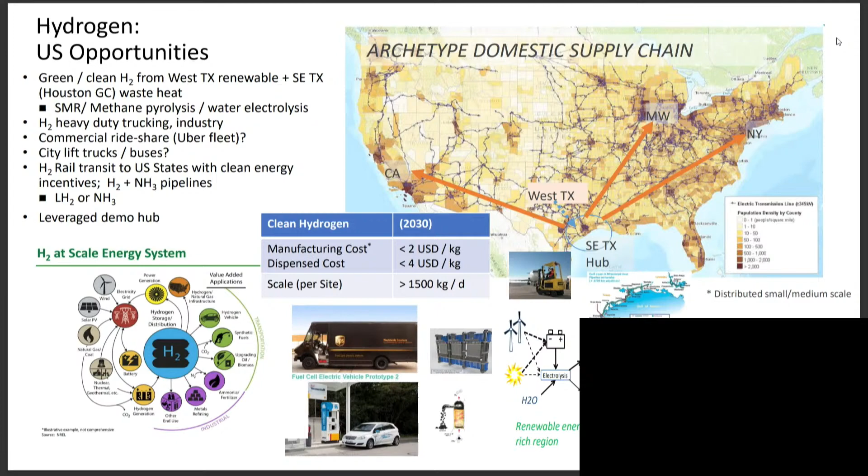And so certainly the Gulf Coast and Houston has every ability to qualify for one of those hydrogen hubs, which the FOA has just come out, and delivery needed by coming into November in terms of concept papers for what those hubs might look like. So a very exciting opportunity for the Gulf Coast area to be emerging as a player in this market.

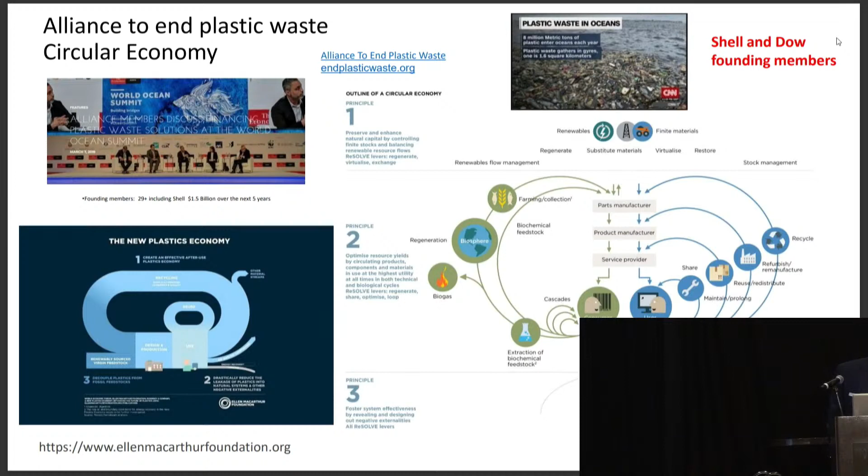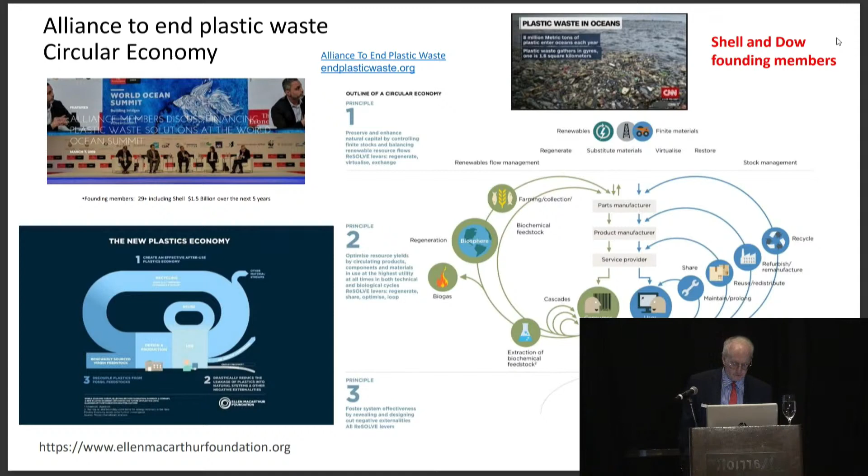We'll talk a little bit about circularity because it's related to the sustainability argument. These are some charts from the Ellen MacArthur Foundation about dealing with things like ending plastic waste in the ocean. So Shell and Dow were both founding members of the Alliance to End Plastic Waste. Like climate change, this has become front and center with quite a number of stakeholders. And so let's step through quickly about what that entails.

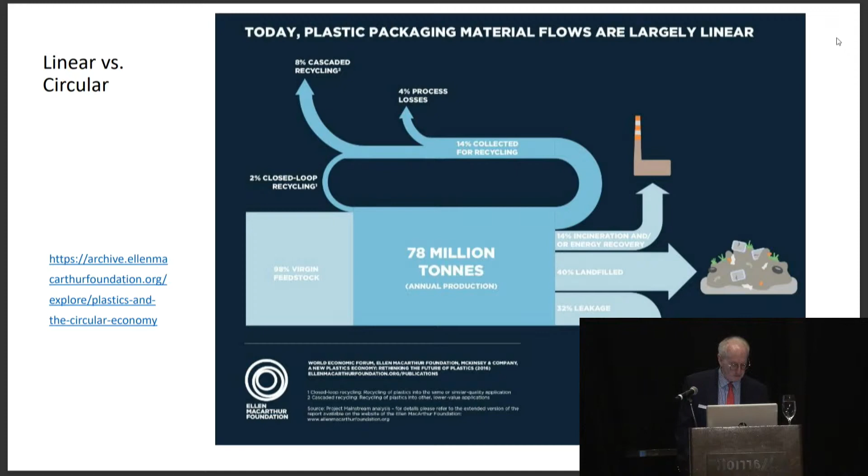The current plastics and chemical economy is now mostly linear. You take in petroleum, maybe perhaps natural gas, you refine and you make products, you use the products, and then you send them to end of life, mostly into landfills or sometimes into incineration in a linear mode.

And so the objective is to move to a more circular mode where you're actually reusing a lot of those molecules as the dominant source of rejuvenating those materials, and then you're making them up with renewable or neutral CO2 sources, which would come from biogenic CO2 or direct air capture of CO2 or green plants, biomass, who has done the capture for you as your makeup to the chemical economy.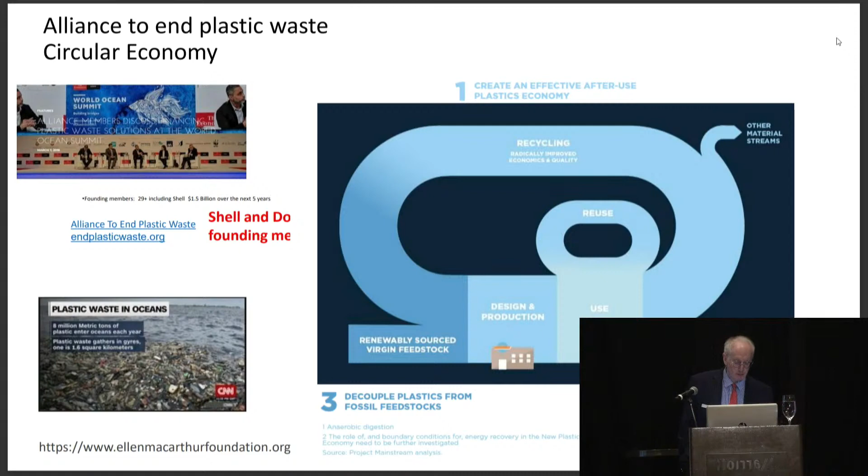If you want to do that, you have a lot of cycles and chains to consider, and what's mostly forgotten about is what happens on the back end at the end of life of these products, and how they biodegrade, go back into the atmosphere, or might be reused to redo that economy. So you really have to look at all the sources and sinks and all of the cycles in terms of how those materials can be rejuvenated.

Ideally, you would like to selectively recycle molecules and not have very many of those materials go back out as CO2 by biodegradation and then have to be captured and taken back from CO2, which is less efficient.

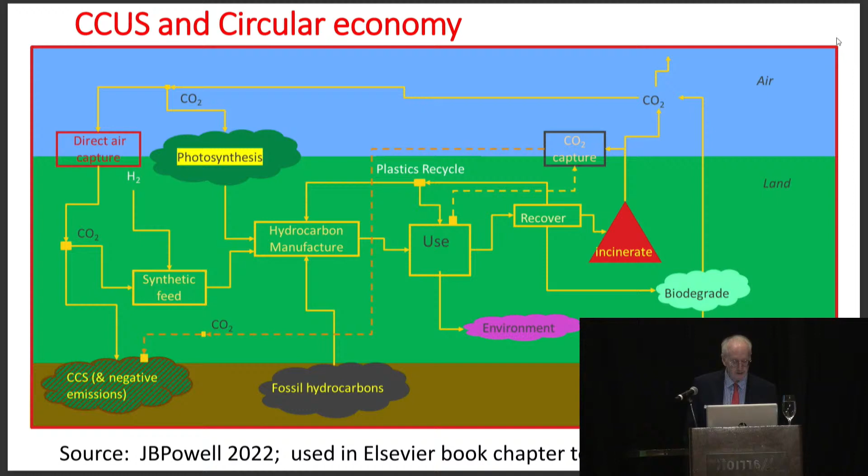But we really need to pay attention to what's happening on the back end, including incineration or landfilling, in terms of end of life for the materials and looking at these cycles.

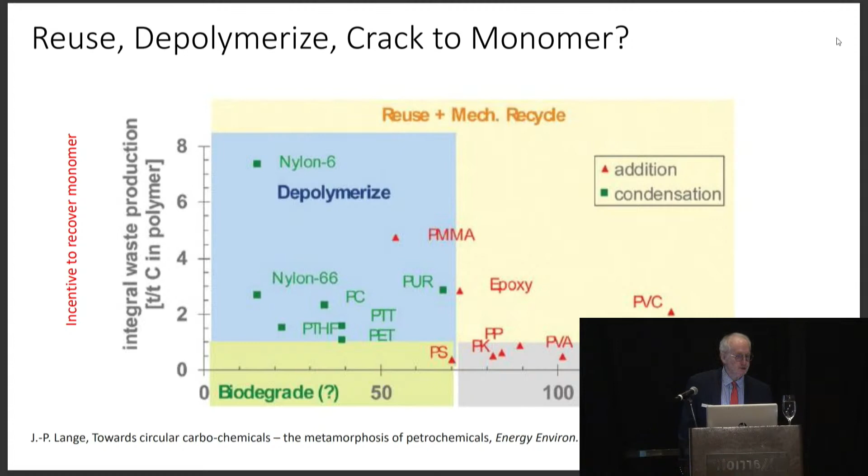My colleague Jean-Paul Lange in the Netherlands wrote some nice papers over the years looking at the bond strengths in the polymers we're using today and what is the best mechanism to recycle. Do you have to do mechanical recycling, maybe downcycling, in order to have a future use? Or if you're looking at nylons or polyesters, they can be depolymerized back to monomer relatively easily, which would be an atom- and energy-efficient way to get back into the recycle economy mode.

The Pew Foundation has looked at what that future circular economy would look like in terms of how these different circularity aspects would come into play.

Some of it is to eliminate the need for some of these materials, to reduce the amount of material demand. Other forms of recycling involve paper, which is relatively easy to recycle given what some of these products are made out of.

As you go down into the greens, you're looking at mechanical recycling of polymeric materials, and into the yellows, you're looking at what happens with some of these plastics and more difficult polymers. In order to get back to the product performance you had initially, you have to consider reformulating from scratch, or at least depolymerizing back to monomer, to regain the property characteristics needed in those products. So the yellows represent chemical conversion, and landfills and incineration going forward.

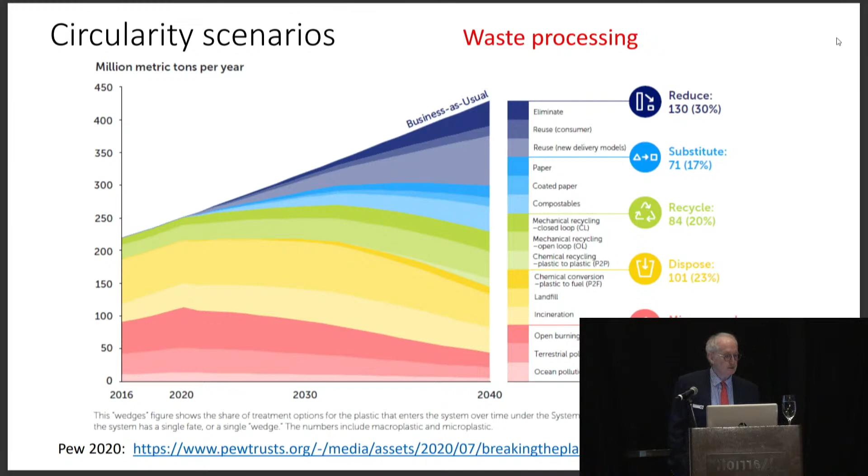And then the pinks at the bottom represent mismanagement, which, given the complexity of recycling, is expected to still be happening going into the 2040s.

So if you're looking at the makeup feedstocks for a circular economy, as I indicated, you could look at recycling CO2 or going in with bio-based feed materials. I'm currently involved in a National Academy study looking at the opportunity for carbon capture and utilization of CO2 to make up that recycle into the circular economy.

To do that, one looks at all the different types of chemical products that can be formed, and the amount of energy and hydrogen needed to bring thermodynamically degraded CO2 back into the hydrocarbon product space, with or without oxygen. The power and hydrogen needs are quite extensive.

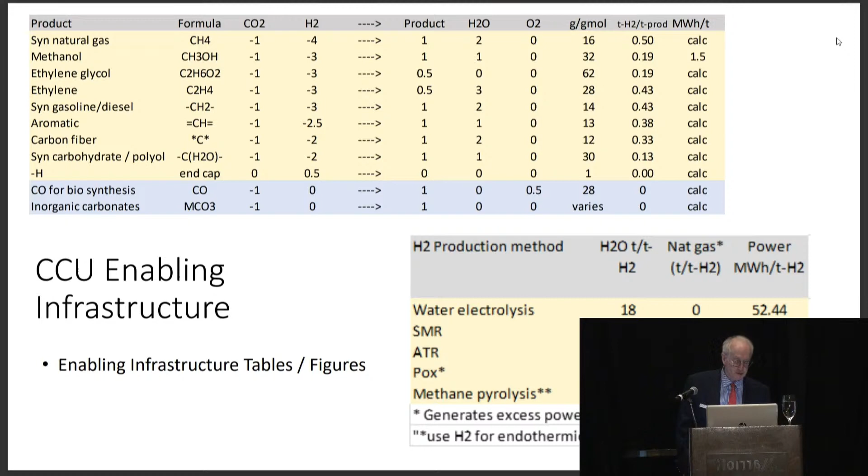So others doing the math find that if you're capturing CO2 and trying to bring it back into hydrocarbon products, you're really using an excessive amount of energy relative to what it would have taken just to store it subsurface. So the net lesson from this is that it's probably easier to get those products from bio-based conversions and biomass than from direct air capture of CO2.

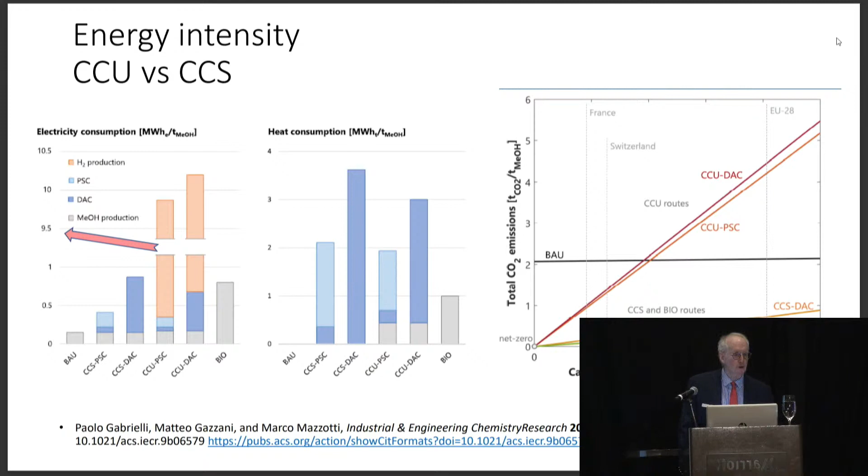And if you got into a situation where carbon capture and storage effectively did not happen because of stakeholder back pressure, then you'd get into an economy with more carbon capture and utilization into products. But the energy you need is quite extensive.

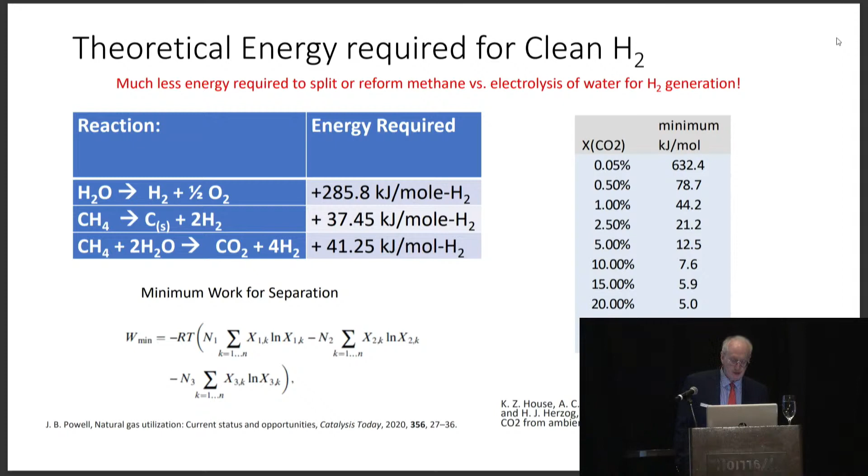A lot of that has to do with the fact that to be sustainable, you need to be capturing that CO2 from the air at 450 parts per million, versus taking it from higher concentrations in flue gases. So to understand that...

So the fact that plastics like polyethylene could have a life of perhaps thousands of years in a landfill doesn't get a chance to play out, because there are also table scraps from dinner tonight that'll end up there, and those table scraps go anaerobically digesting to make methane, which is a very potent greenhouse gas.

So a lot of overall circularity management uses incineration to deal with that problem. Some uses try to capture and use the landfill gas, but in general it's becoming more and more difficult to maintain and use landfill sites, meaning more incineration going into the future. Given the problem with segregation of plastics waste, a lot of those plastics end up getting incinerated in that economy.

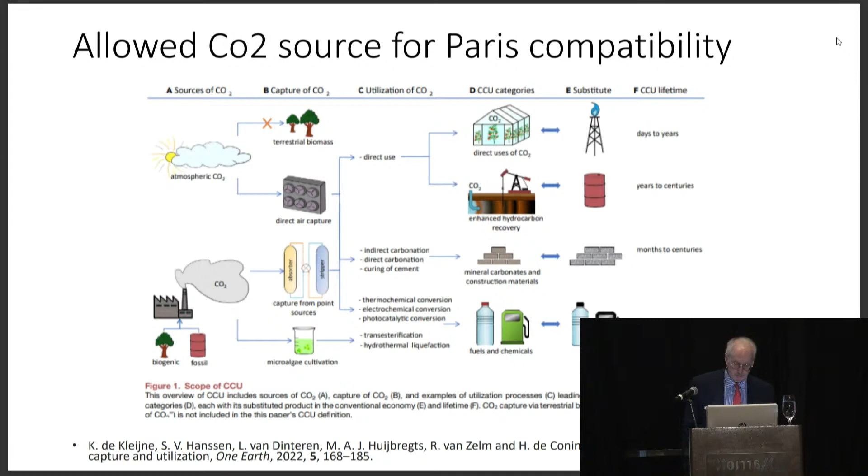The makeup needs to be biogenic CO2, coming from either direct air capture of CO2, or from something like the off-gas of a bioethanol plant, where that's a bio-CO2 molecule that can be low-cost captured and utilized. That's where the EU is getting in terms of circularity and what would be considered a green, sustainable chemical product. There's a lot of pressure in the US to consider the same type of standards given the international trade of chemical products. This was all part of Mission Innovation right after Paris in 2015, and continues today in looking at what to do about that circular economy.

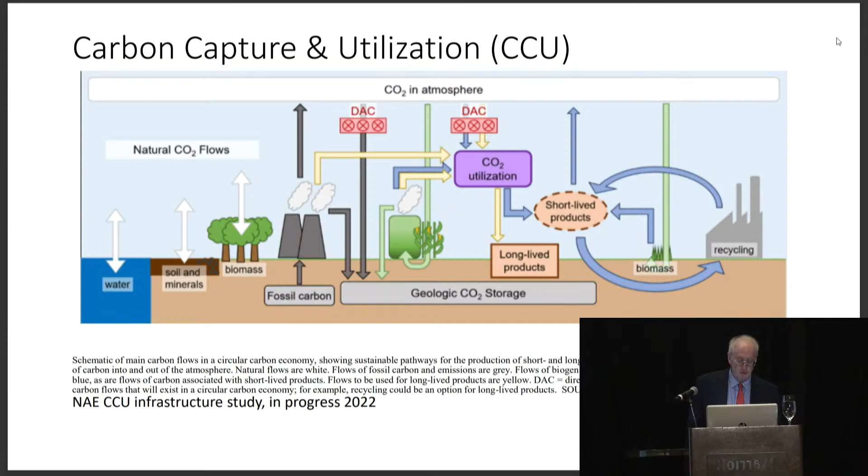Cement plants are interesting because the CO2 coming off of limestone is unavoidable, and that may be a target for something that can be utilized. The fuel needed to calcine that limestone is fossil and can be avoided, so about half of the emissions of cement manufacturing may represent CO2 point sources that could be utilized, since it's really unavoidable CO2 needed for building materials. That's really what's happening in the circularity space, looking at the different sinks and sources of makeup carbon going into that circular economy.

If you're starting with biomass, you can make just about anything from biomass in terms of the components in the current economy, and you can do the same thing with CO2 by reacting it with hydrogen using syngas chemistry. So both are equivalent in terms of the breadth of products that can be made.

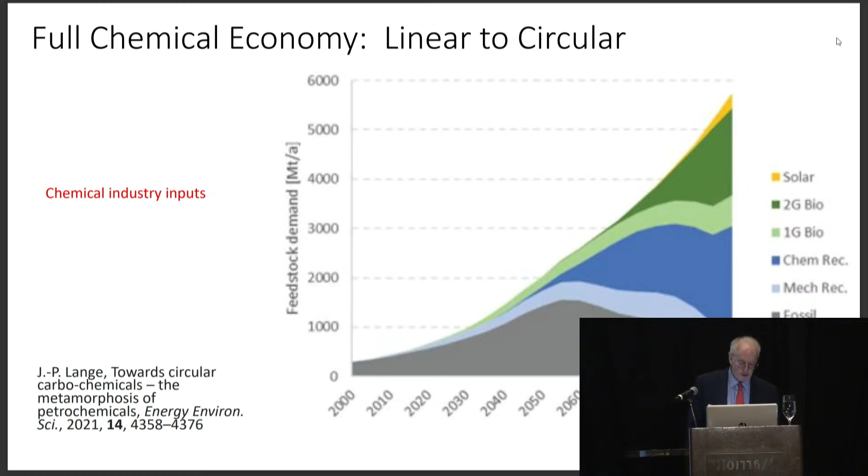My colleague Jean-Paul Lange looked at what that future circular economy is likely to look like, showing one of the first simulations of what those different sources may be. The gray shows continued use of fossil feedstocks for the hydrocarbon chemicals industry. The light blue is mechanical recycling, the deep blue is chemical recycling including depolymerization, the light and deep greens are bio-based biomass feedstock makeups, and the yellow is solar-direct air capture converted materials. That gives you an idea of what that may look like going forward into the future.

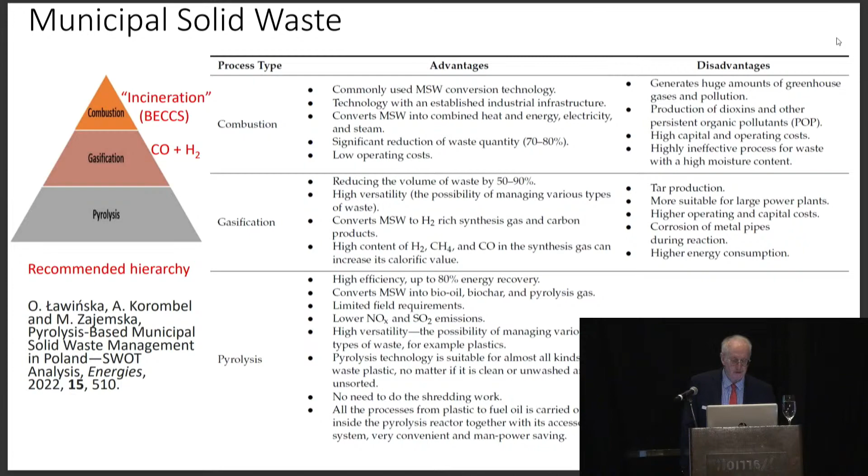In terms of managing waste facilities, pyrolysis is an emerging technology, more efficient than gasification and incineration, for recovering value from those materials.

To summarize: circular economy is orthogonal to the climate change problem because it takes a large amount of energy to recycle hydrocarbon materials. Unlike aluminum cans or paper, which can be very efficiently and cost-effectively recycled, it costs more money and energy to recycle the chemical economy. But certainly the stakeholders are asking for that, and that's one of the exciting things the U of H Energy Center will be working on, along with many others making that happen.

Hydrogen plays an important role in those conversion reactions. In terms of priorities, you're better off using all your new clean and renewable energy first to decarbonize the grid, because of that efficiency argument I made earlier. If you start using hydrogen instead of electrification, it takes twice as much energy as a vector; if you're making chemical products, it takes up to four times the energy. So grid decarbonization is a one-for-one trade-off and is certainly the thing to look at first in terms of how to use a given amount of energy.

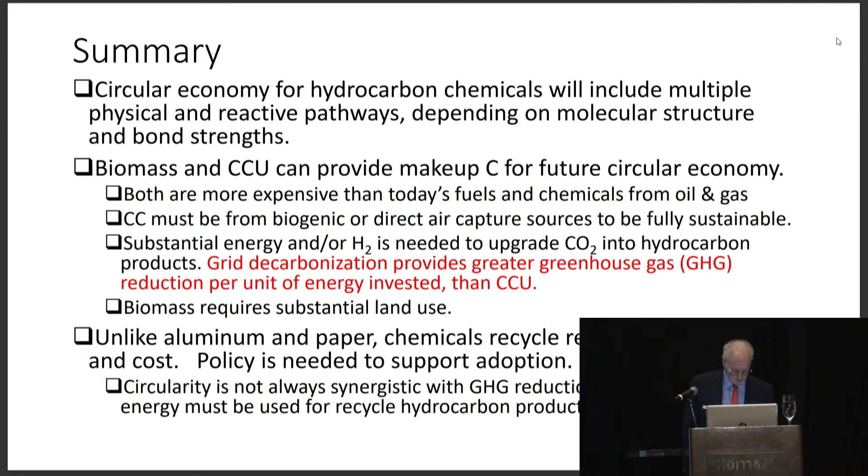So with that, I'd be happy to hear from you if you're interested in working in that space. Again, exciting things are evolving in many directions, with U of H being one of them. Look me up if that's an interesting area for you and your company. With that, thank you for your attention tonight, and thank you for the opportunity.